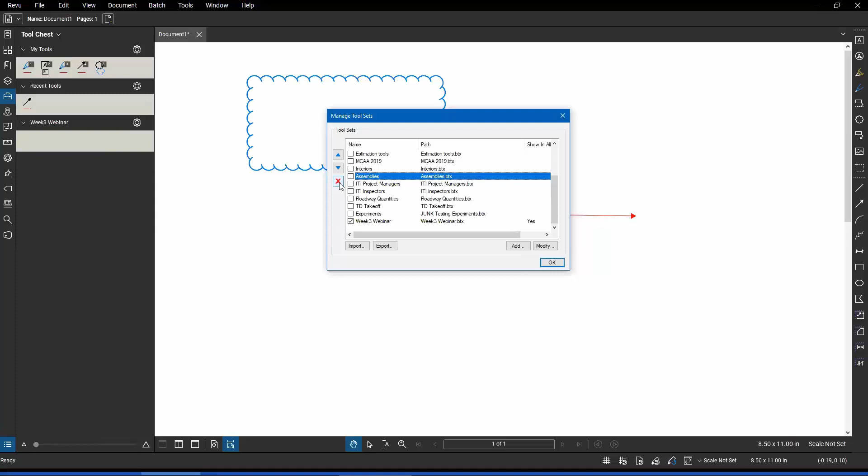The reason it is disabled for delete is not because I've got it active or displayed or not displayed, it's 100% because of my choice to make it show in all profiles. When a tool set is displayed in all profiles, you cannot delete it.

So what you would have to do is modify it and undo that choice. That will now make it only available in the current profile, and then you'd be able to select it and delete it if indeed you chose to do that for some reason.

So I'm going to make it visible, hit OK, and open it up right here. Now I've got two markups in my document. I'm going to draw a couple more. I'm going to draw a highlight, and then since my document doesn't have any scale, I'm going to go to the lower right-hand corner and add a scale to it, and I'll say, just for giggles, this is 1/4 of an inch equals a foot.

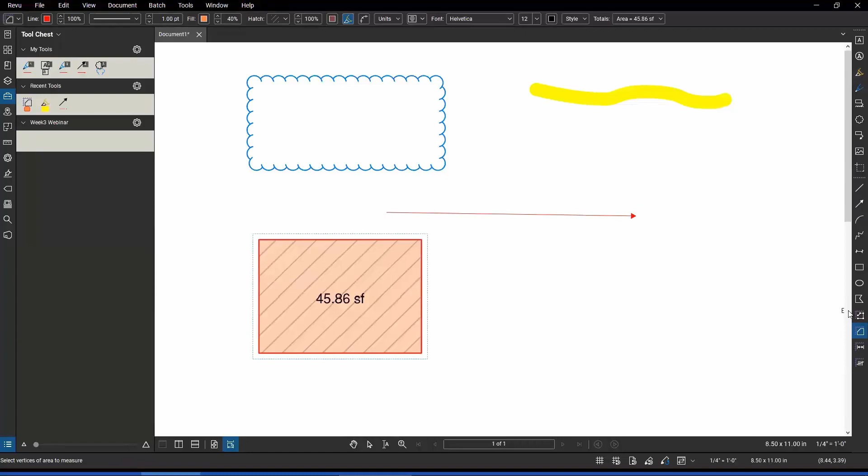And then I'm going to place an area measurement, and then I'm going to go place a poly length, so that I've got some markups in there that have actual measurement values associated with them as well.

Any one of those things I can select, right click, and choose Add to Tool Chest. Now I've only got two that are available to me. You see Recent Tools obviously is not one that's available because that's not how it works. It tracks you, you don't put stuff into it consciously. And if you put something in there, you want to get it out before you shut down Bluebeam.

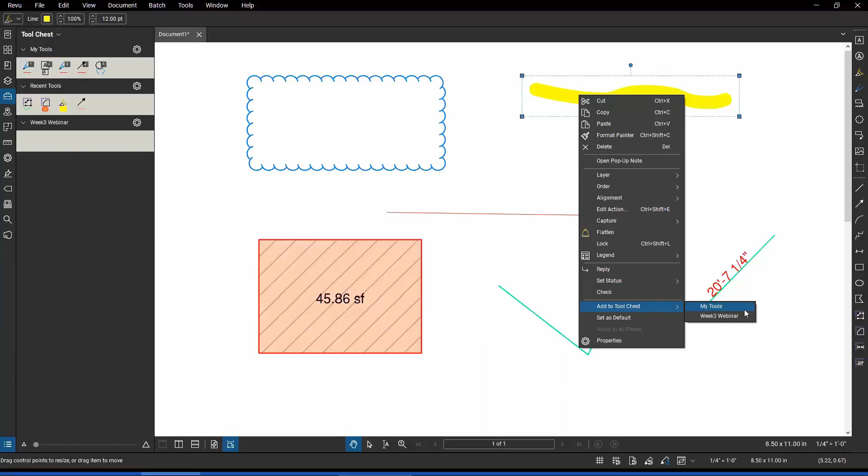So I'm going to choose this new one and put it in there. I'm going to choose this cloud and put that into that same one. Then I'm going to grab the area measurement and put that in there. And then I'm going to grab the poly length and put that in there as well. So I've got a total of 4 markups from my 5 markups that I've now put into a toolset.

For future reuse, I'm going to grab everything in the document and just delete it because it was only there so that I could populate my toolset.

When you're looking at a toolset that you've created and put markups into, there's 2 different ways of using them and putting them back into documents. One way is to simply click on it, and it will go into your drawing, whichever drawing you currently have active, and you place a data point, and it makes an exact copy of it. Now, as soon as it did it, it stopped and it let go.

That's because in the status bar at the bottom of the page, I currently have my reuse markup tool disabled. I'm going to turn that back on. Now, when I come in and choose that same markup and place it, I can keep placing it and placing it and placing it. So it works the same way. This reuse tool works the same way with toolset markups as it does when you're creating markups from scratch.

It starts a function, and I'm just doing Control Z here to undo the things that I've done. It starts a process, and it keeps repeating that process until you hit the escape key. Now that's one way of placing a markup from a toolset, and it's called drawing mode. What that means is I'm going to choose it and place it, and I want a copy that's exactly like it, exactly like it.

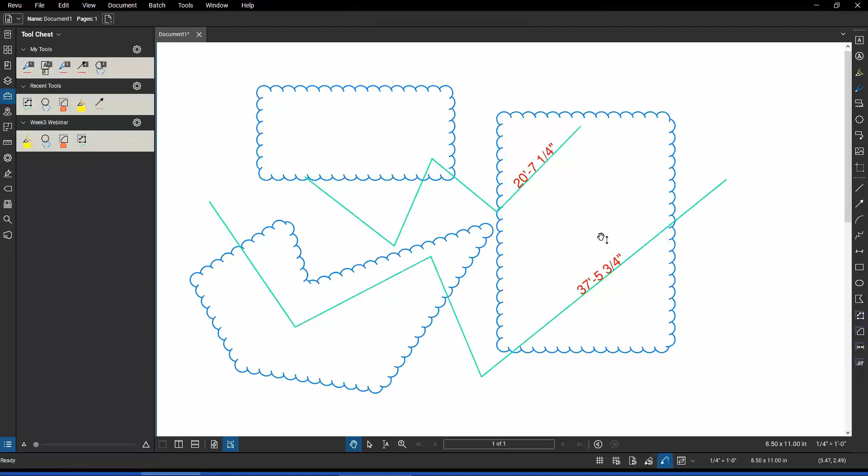I'm going to delete all of that and we're going to talk about standards. When I come in here and draw a cloud from here to here and it's blue and has all that type of stuff in it, unless I go to the trouble of making certain that all of my defaults have been set to exactly the way I want it, it's always going to default back to the delivered standard. Now I'm going to right click on that and look at some of the things that we can do.

Some of the things you really want to think about here is whether or not you want to put this on a particular layer. An example of this is when you're doing design review, you probably don't just want all markups to be blue. You want a standard so that when a group like the architectural design firm comments on our document, especially in a cloud studio session, their markups look like this blue cloud and are placed on a named layer. I'm going to create a layer called Architects Comments.

But I don't want that to be my default because I do a whole bunch of different types. If I go back and hover over that cloud, that copy of the markup was created several minutes ago. It didn't have any layer assigned to it, it didn't have any specifics assigned to it, so I'm just going to grab it and delete it, get it out of my tool set.

Later on, I'm going to grab this one and make sure it's exactly what I want. I'm going to change the fill to also be blue, but with a very light screening associated with it. It's already on the proper layer that I want. Now I'm going to add it to my tool chest, and when I hover over there, you'll see it's got a layer assignment. So every time I place it, it will go to the layer specifically assigned to architectural comments versus engineer comments versus contractor comments versus auditor comments, whatever your particular project participants happen to be.

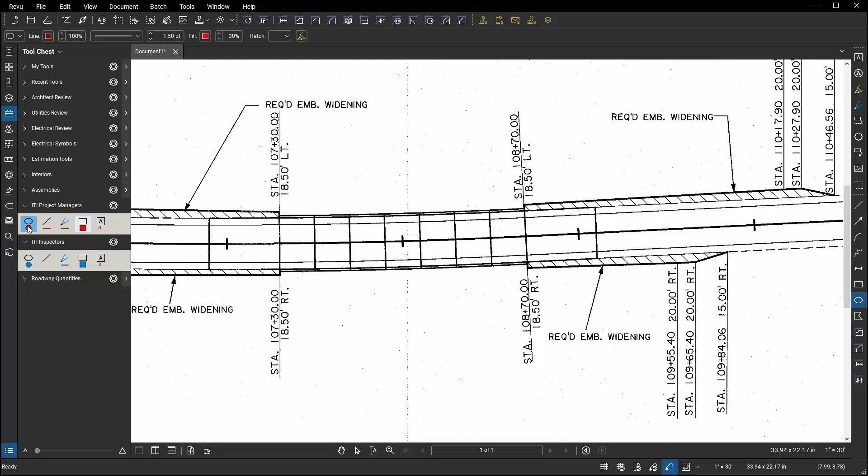So if I choose a Project Manager markup and place it in the document, then go back and check my layers, just by the act of marking up the document, the layers have been generated automatically. If I go back and choose an inspector markup and do something along those lines, then check the layers again, we'll see that one's been generated as well.

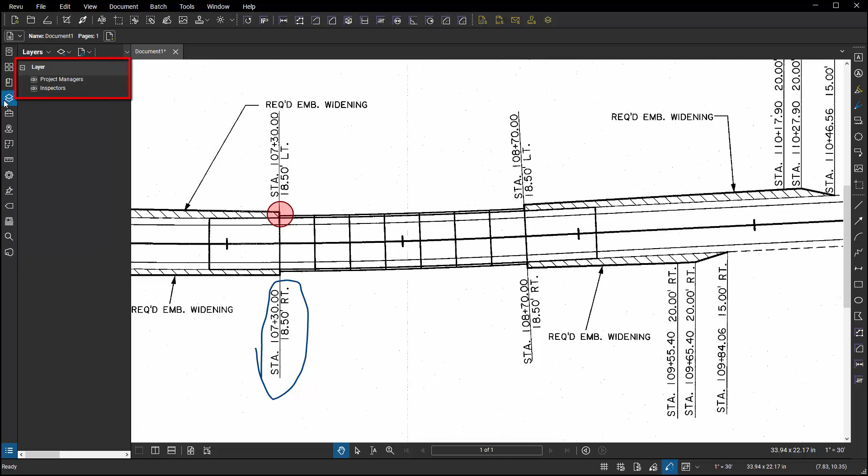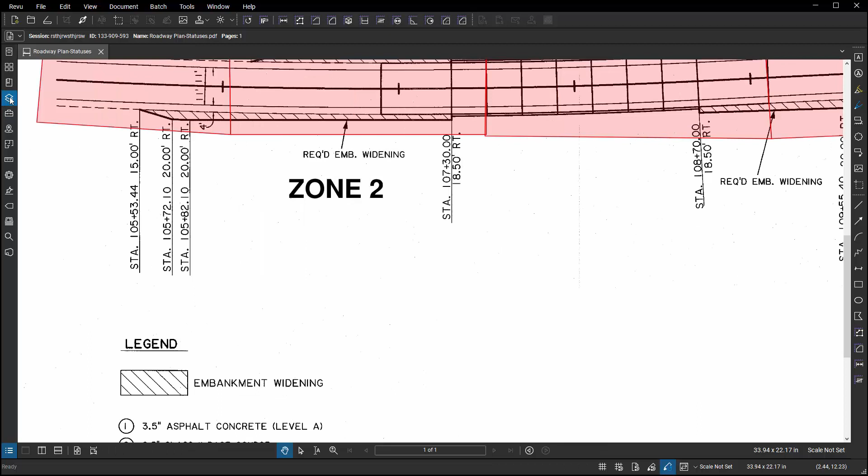Now, one catch to this is that if you're working in a studio session, the layer names have to exist in the file before you start placing markups into the drawing, or they're going to be placed in there without the layer assignments. Here I'm in a studio session and I've uploaded a copy of that exact same file, and if I look at the layers, we can see there are no layer names created here. If I go back to tool sets and use the exact same tool set with the exact same markups, and place a markup into this document, we'll see that the layer name has been prevented from being created. And if I select that markup and right click, we can see it also has not been assigned to a layer.

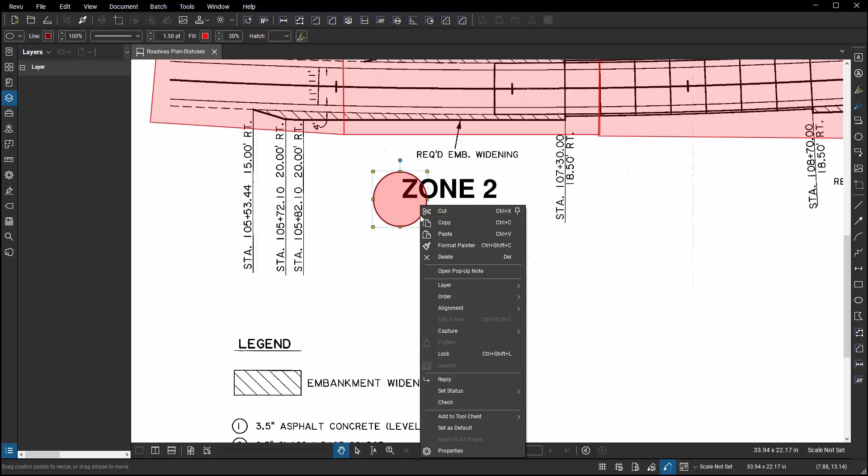Now that will work properly provided the PDF file has the layer names before it's uploaded to the studio session. But it still calls it a cloud. And what I really should do is, before I put anything into a tool set, put some real good thought into what I'm naming it, so that when I look at the markup list down here, instead of it just saying cloud, it has information that helps me understand what that thing is. So you really want to change that to say these are, I'll just call it architectural. It's already in there, that's fine. Now, I don't want to keep doing that over and over again.

So instead, what I should have done, the better methodology for you guys to follow, is when you have your graphic created that you're going to put into a tool set, in addition to doing any kind of layer manipulation that you're going to do, also while it's highlighted, go look at the properties panel.

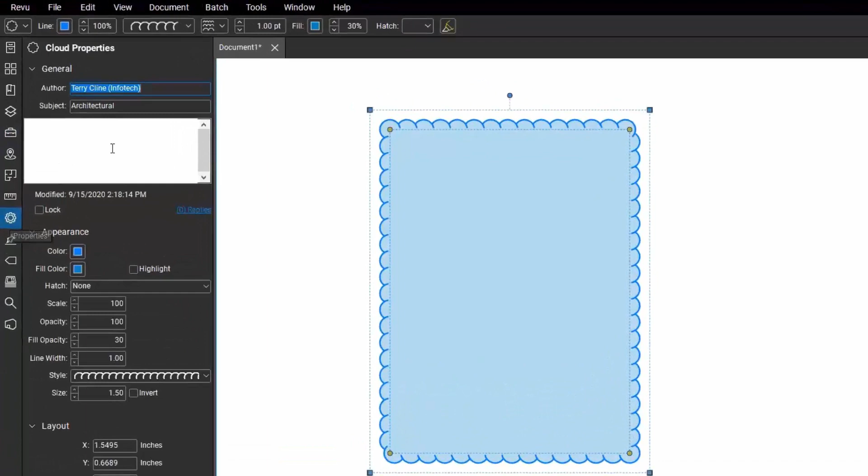Inside there, specifically, you want to look at the top of the panel, and look at the value that's in the subject field, right in here. I'm going to put architectural, so it's got the proper label that I want, and all the values that I want.

Now I can either come back and right click and add it to the tool set, or directly from the properties panel, I can go to the bottom of the panel where there's another link that lets me automatically pop it in there. Now it has both a good subject, a good layer, and all the properties and characteristics the way I want them.

I've already shown you by double clicking or choosing drawing mode, you can change the behavior of a markup as you put it back into your file. You can also change the behavior of the tool set itself, not just the markups inside of it. I'm going to minimize these.

Currently, this displaying of the content of a tool set is called symbol mode, because it's showing me an abbreviated icon for each of the markups inside of this tool set. But if you go to that gear, click on settings, and change it from symbol to detail display, it's the same information but displayed in a very different way.

It also gives you access to two other columns of information for all of the markups that you put into your particular tool set.

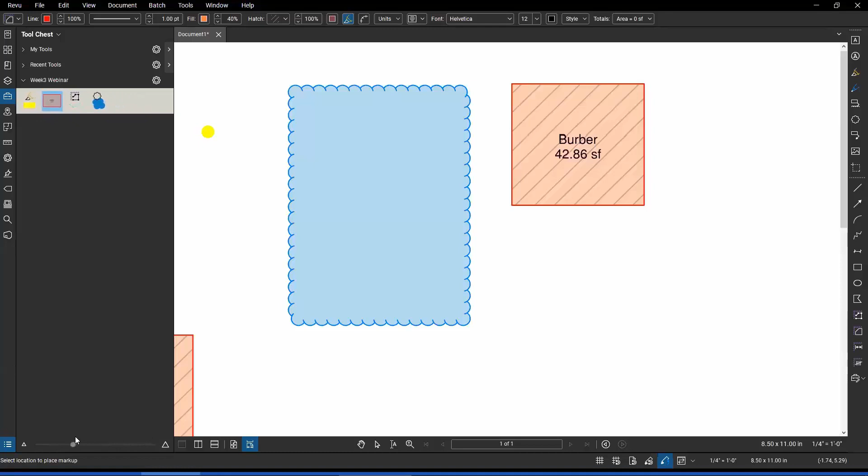Down at the bottom of the interface, there's a sliding magnification button. If you grab that and slide it left and right, it gets bigger or smaller depending on where you put it. I need to be very clear, that has nothing to do with the scaling of the symbol as it goes into your drawing. If I choose drawing mode, click and place that shape, then come back, lower the magnification, and place it again, it's going to be identical. This slider bar is purely a magnification feature so you can see it more clearly, and you've got control over the size of those icons as they're popping up.

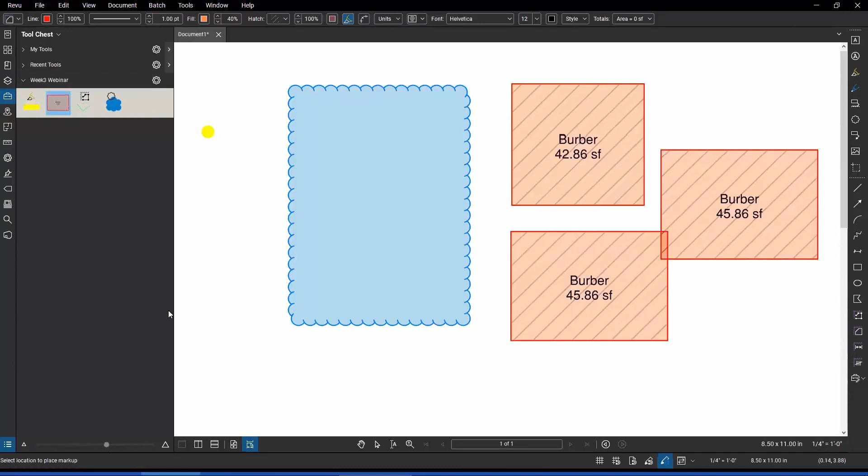And if you do magnify it along those lines, and go back to that toolbar over there, it still supports that, because whether you docked it into a toolbar or not, it's still using the same core part of Bluebeam to look at these parameters, these behavioral choices you've made, and then enforcing those as it does its work.

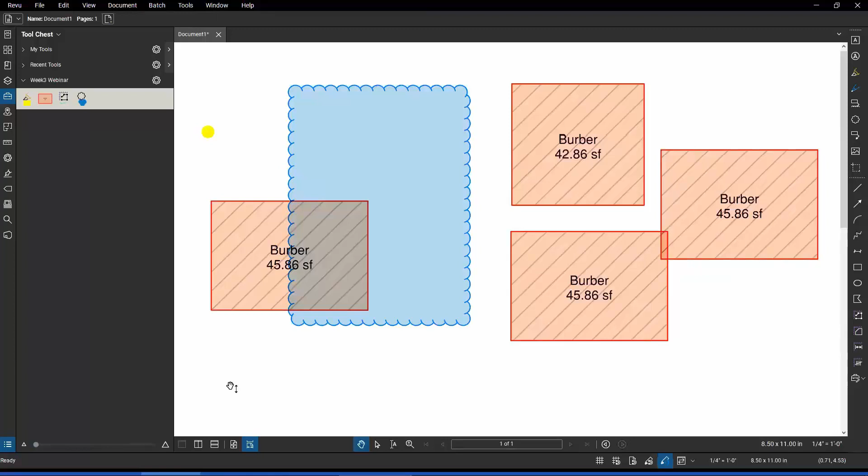Now I'm going to grab all of this stuff and delete it. Now I want to talk about the subject and label combination I've put inside here for one of these things, like this one that says—if I hover over it, it'll tell me that's chilled water line. If I hover over this one, it tells me it's carpet with Berber, and so on.

I've already covered in past week information on custom columns. So down at the bottom here, in addition to these delivered columns, we can go into the markups list, columns, and at the very bottom of that interface is the Manage Columns button, where we can create columns of information unique and specific to us. Maybe a common column people create called responsibility, where there's a pick list that says, okay, I drew this markup, now I'm assigning it to a human being or a subcontractor or whoever it may be—responsibility is a common one.

Now I could sit here and create them from scratch, but there's an option called import, and I've already created some custom columns and saved them. So I'm going to import one of my custom columns by going to where I put them, which is my Revu files, custom columns. Let's go look at flooring types. So I import that, and it says, alright, I'm going to put this into your file.

So here's what I have. I have a column for tracking flooring type that has a list of types: shag carpet, Berber carpet, tile, 9x9 tile, concrete, and each of those is assigned a dollar value for their square footage cost. This is just a pick list of items. But what's important is it's got a subject and it's got something called an item. When you take a markup in a tool set that has a subject and label combination, and it matches a subject and item combination in a custom column, it can automatically detect that relationship and automatically figure out what the cost value or assigned values are.

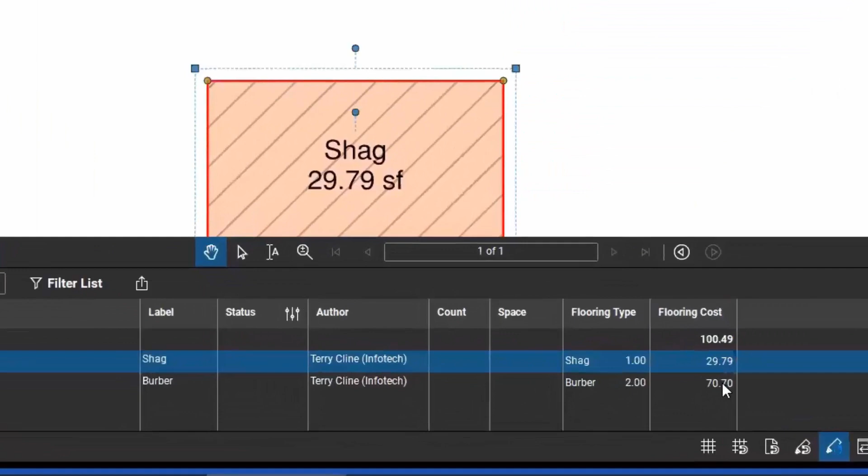Based on what I did, I should be able to choose to place an area measurement specifically identified as carpet with the item or label as Berber. When I choose a standardized markup from a tool set that's been set up properly with the right subject and label combination matching the right subject and item combination in the custom column, I'm not telling it this is shag carpet or Berber. I'm just drawing the object. It's detecting that, figuring out the dollar value, and then running the formula that says take the area, multiply it by the dollar value assigned, and give me a total.

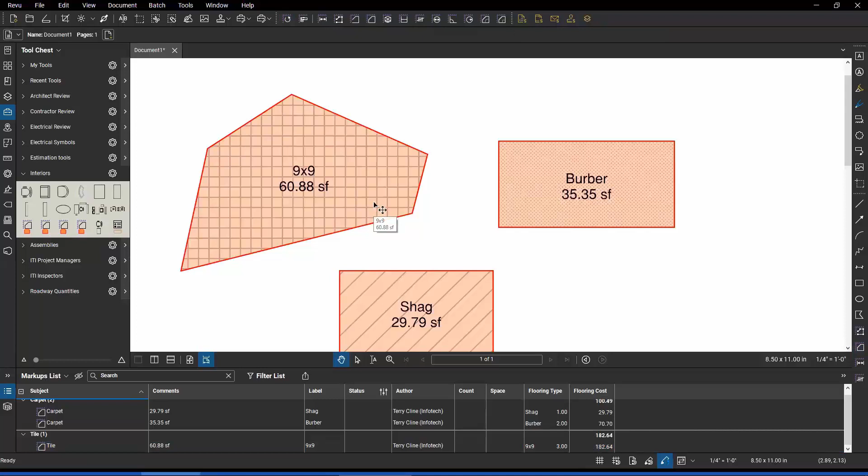So if I came back and said this is a 9x9 tile, now we've got a completely separate one down there. That's another way of gathering up markups. I'm going to grab all of these things and delete them, going back to that other profile called empty, so we can continue pushing stuff into here.

I'm going to open a brand new document from a template, and I have a template here for architectural sections. I think there's some stuff in there I could grab—yeah, we'll grab that symbol for grade right around in here.

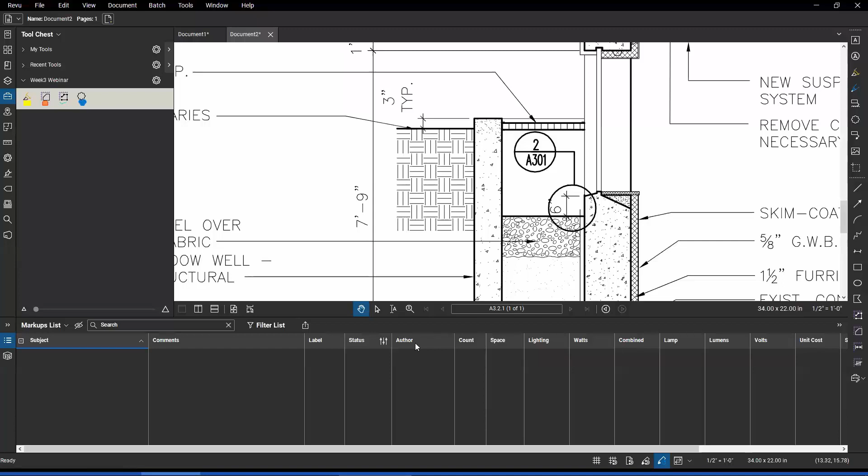Let's say I wanted to capture that and make it a reusable markup I can use in other drawings. That currently is not a markup—it's part of the actual PDF file, it's PDF content. But there's a feature in Bluebeam to capture PDF content and make a markup out of it.

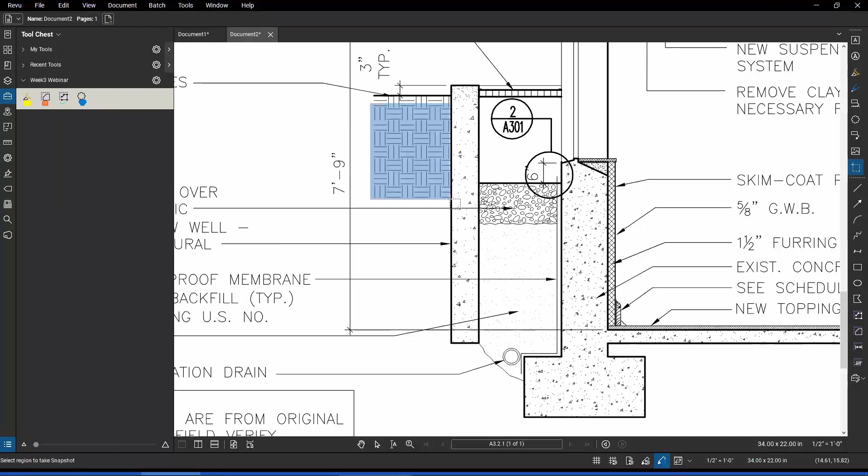That feature is called snapshot. If I go to edit and scroll down, there's one called snapshot, and also snapshot content—they're slightly different, but this one will work fine. You do snapshot and simply click and drag a rectangle around the object you're trying to capture. It puts it into a clipboard, and then you can right click and paste that into your drawing.

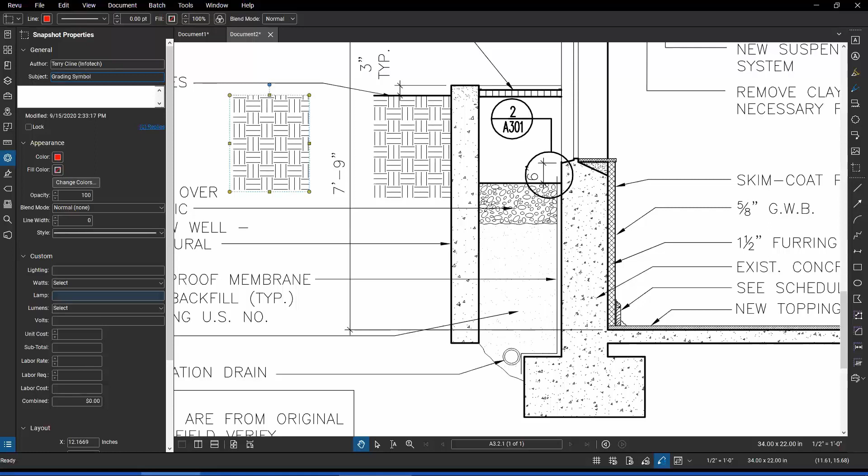If that's exactly what you want, you can right click on it and add it to a tool chest. But before you do, I'd suggest you go to properties and give it a decent name—so it's not just a snapshot, it's grading symbol. Then I'll go down and add it to tool chest, putting it into that week 3 webinar. That way when I click on it and place it, it's going to say grading symbol instead of just snapshot like it did before.

If I wanted the same thing for concrete, a repeatable copy of this concrete pattern, I would go in and do the same thing: edit, snapshot, grab as much of it as I felt was important, then paste it. Then in properties, scroll up to subject and call it concrete pattern, then scroll down and add it to my tool set.

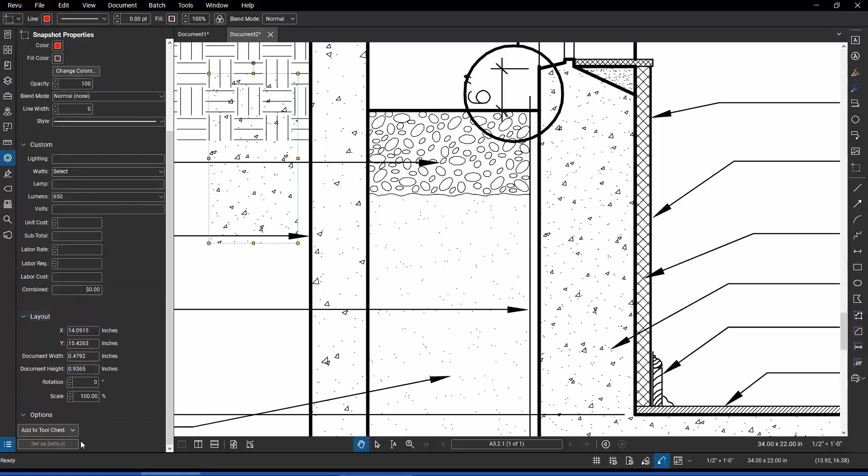Now, here's the thing people do when they first start doing captures with snapshots—they get it in there and forget that they put it into the drawing just so they could grab it. So make sure you don't forget to go back and delete the stuff that's already there.

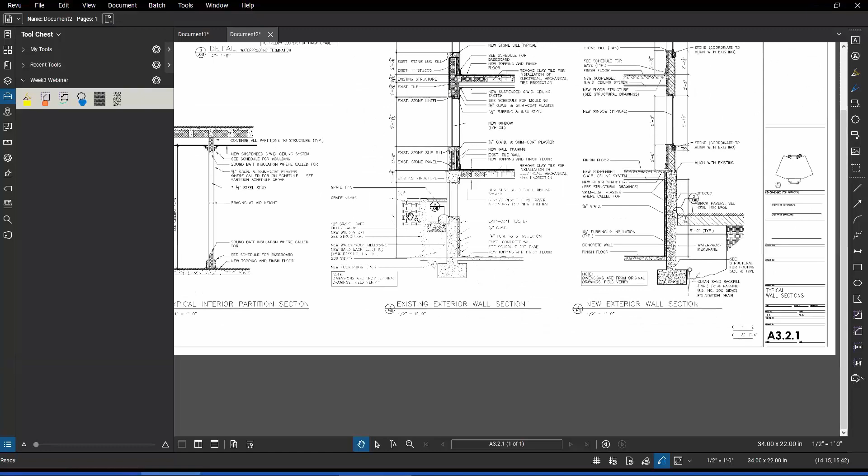Okay, next, creating counts. Now I'm going to open up a different drawing here. In fact, I'm going to close down all of this stuff, and we're going to talk about count markups and how that's relevant to your tool sets.

If I go and open a new file, I'm going to say File, New Electrical File right here. So what I want to do is I want to count these symbols.

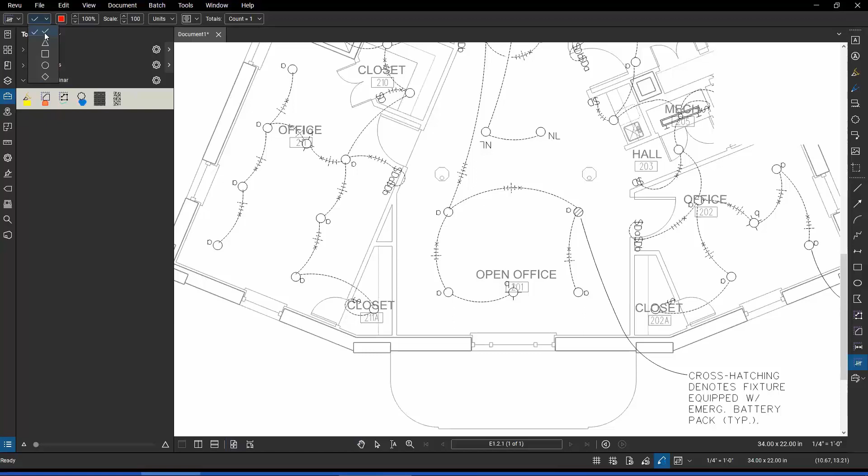Now I know I can come into the standard delivered markup toolbar, and there's a count button there, and I can choose that. I can go into the Properties toolbar and change it from a checkbox to some other shape. But I'm just going to leave it as a checkbox right now, and I can just start counting.

All right, there's one of those. Oh, that's different, that one's different. Here's one of these, one of these, one of these, one of these. We talked about that last week or the week before when we were doing count searches and so on.

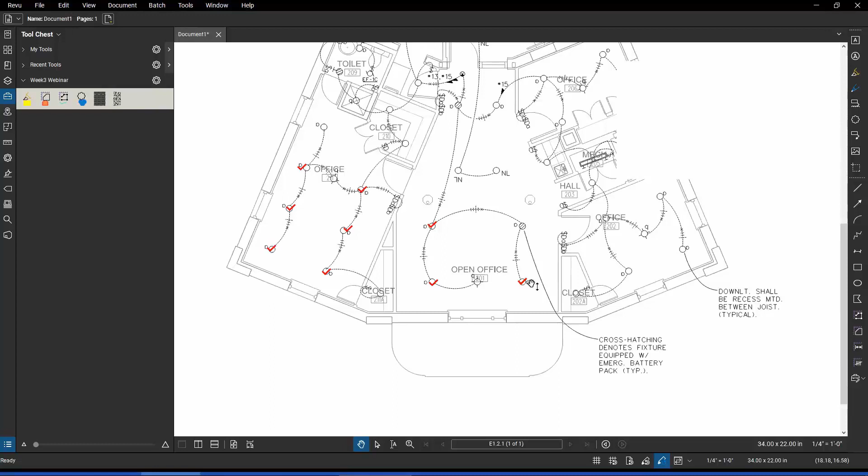But that's a way of counting items on your drawing. Now, if indeed you wanted that to look very different, I'm going to grab all of that and delete it. You can create your own markup and use it in order to count things.

Now I'm going to put a little cloud here, and I'm going to grab that cloud, right click on it, and go to Properties, and change a few things about it. First, I'm going to change the layer, and create a brand new layer called Spotlights. It doesn't exist until this moment, but now it does.

Now I'm going to click on that thing, and I'll say that this is a spotlight. Now I'm going to add it to our tool set by telling it to add it to our tool set, and it did. Now I'm halfway there.

I've got a symbol that represents spotlights, but if I click on it and start saying, okay, there's one, there's one, there's one, it's not really counting at this point.

What I need to do to have a counting version of that is go into the tool set, click on it, right click, and say I want to create an equivalent copy that has the same parameters, but it will keep track of how many. It's an actual counting markup. You can always tell the difference between one that is and one that isn't, because one that is has this little 4 slashes with a slash through it, a mathematical indicator with the little scale value.

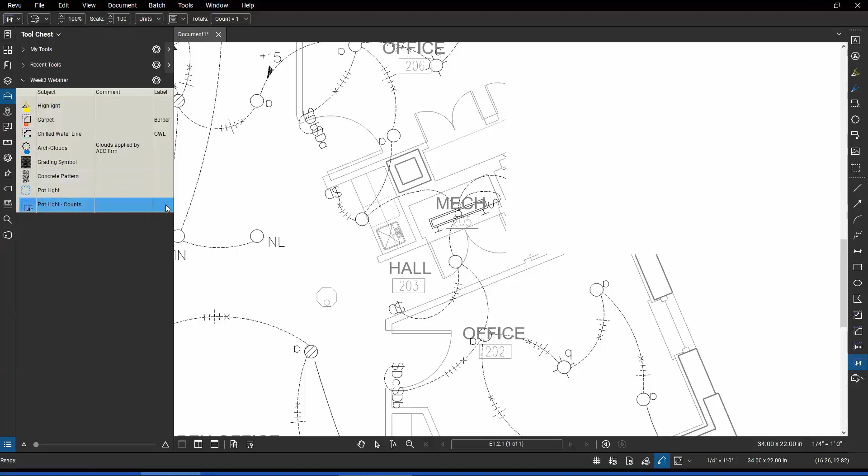That's the count measurement. Now, if I go back into detail mode and change this, I'm going to call this Pot Light, I might even put counts, something along those lines. And maybe under label I put in Pot Light, but you don't really have to. I just wanted you to know that that was there if you choose to use it.

But now I can choose Pot Light, and I can come over here from my tool set and say, all right, there's one, there's one, there's one, there's one, there's one, there's one. I hit escape, I go down and look at my markup list. It says, hey, for pot lights there's 6 of those, and they all happen to be on a particular layer.

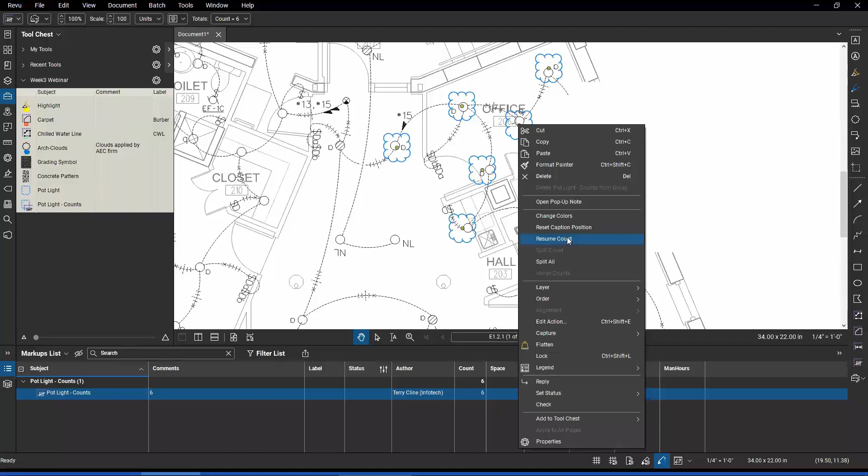And then I realize, oh yeah, I need to keep going with that. There's one here. So I go and right click on the existing count. Now I can take advantage of the same count markup features I get when I do it from scratch. I can resume counting if I choose to do that. So, oh yeah, there's one over here, there's one over here. Do that, hit escape. Now it knows that there's 12 of those instead of 6.

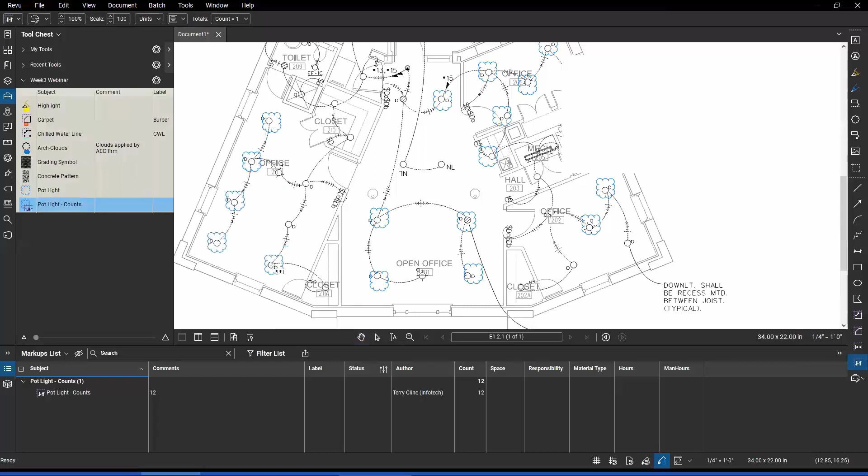Or maybe I don't resume count, I do different counts where I come back and say I want to do a count, boom, boom, boom, boom. Hit escape to get out of that. Now it knows that there's a total of 19, 12 of which are grouped together, and 7 of which for some reason are in a separate grouping.

Right now you can always merge those together or split the counts. There's lots of things that you can do with that.

But the other thing you can do, now that you have a tool set, and in that tool set you have a count item, when you come into the standard markup tool for shapes that's delivered from Bluebeam and you start doing manual counts, in addition to these shapes that were there before, if you have a tool set with count markups, you can come in and take advantage of those and say, okay, I want to start counting things, but in particular I'd like to use this markup instead of one of the delivered shapes that comes from the system.

Now here's a more dramatic example of that. I'm going to change my profile back to the one I normally use, and do that same task - say I want to count some stuff. When I go to do that pull down, I've got multiple tool sets, and within each of those tool sets, I've got multiple markups with different subjects and labels and that type of information.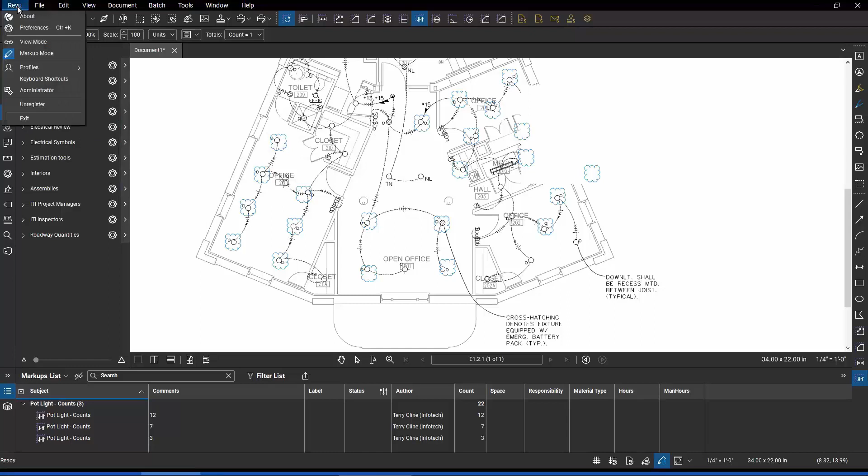It even remembers if that tool set has been set up to display in symbol mode or drawing mode, so all of that information as you're interfacing with the tool sets is still there and available to you. I'm going to jump back to the other profile to get to that tool set we've been creating. So far we've been putting stuff into it, but haven't done anything to the tool set itself, so I'm going to put it back to symbol so it's not so big.

By the way, any one of these, if I double click on it, that's the drawing mode versus property mode. If I click on a count markup, you can't do that - those always go in drawing mode. Same thing with snapshots - if you do snapshots of PDF content and make that a markup in your library, when you double click on it, you don't have the option of going to property mode. That's only for markups created from scratch that aren't count markups, which allow you to toggle it over to either drawing or property mode. So don't be surprised when you're trying to double click on a markup to toggle it to property mode and it doesn't do anything - it's just not set up for that.

Now this tool set has yet to be actually saved, and I've added a bunch of stuff into it. So occasionally, if you're changing the content of your tool set, you're going to want to go and save the changes you've done to it. You can always tell just by clicking on that gear and looking to see if it's been saved or not. Saving it updates the server in essence, or updates your local hidden folder where all your tool sets are stored. It's not the same as making it available for someone else.

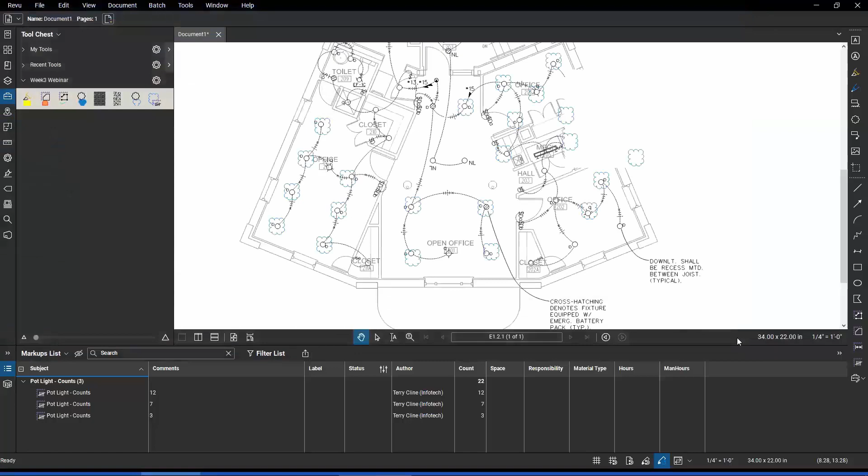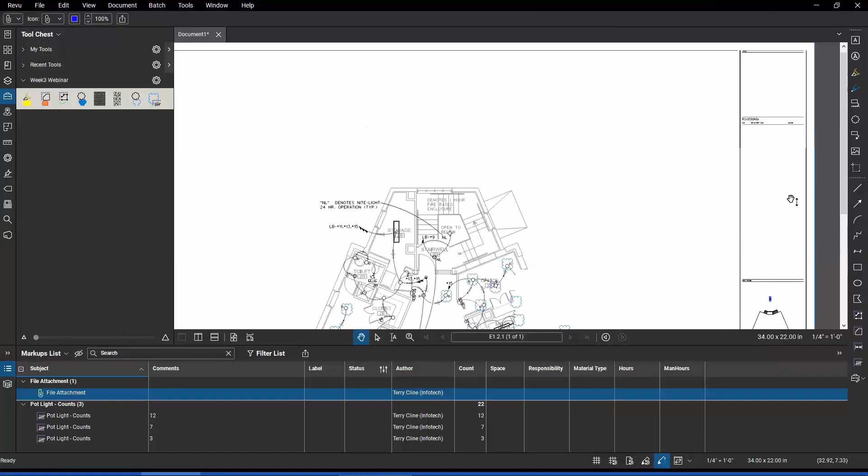I showed recently another way of doing that - go into your document under tools and do a file attachment, taking that same BTX file you created. What I'm showing you, you can do with any file. I'll hit OK, and I'm just going to paste it into my title block. Whomever I share this PDF file with, it's got the BTX file as an attachment embedded into it.

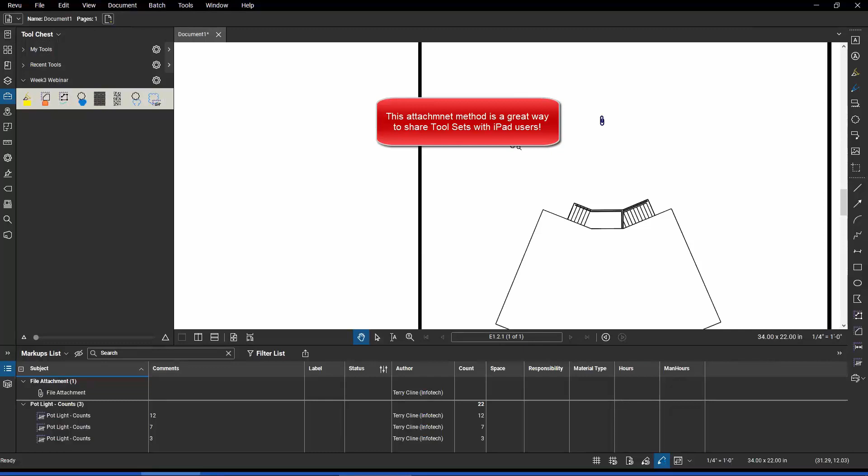All they need is access to this PDF file, and then they can double click right on that paperclip, and it'll take that BTX file and automatically open it up and put it where it's supposed to be, making it one of their accessible toolset files as well. So how you get it to the other project participant doesn't matter as much as the fact that you need to be able to export it and then share that BTX file with them.

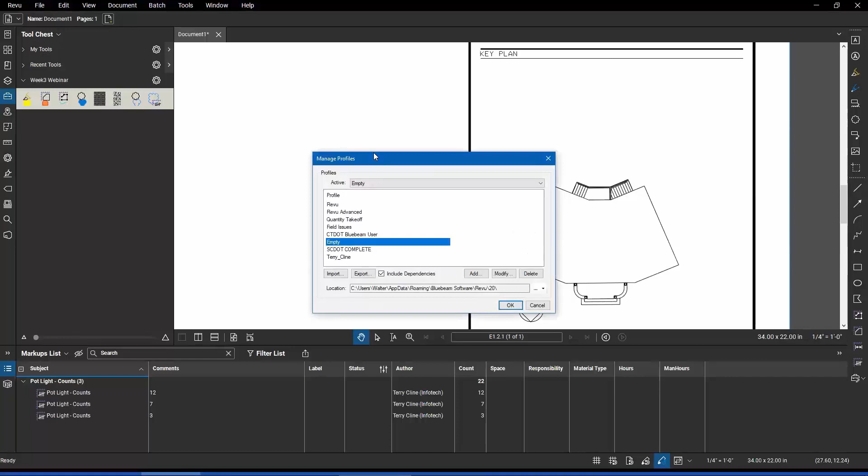Now in the first week, we talked about the interface, and I mentioned that tool sets are part of what makes up a profile. If you were to go to Revu, then Profiles, then Manage Profiles, I can take this entire profile that I chose to call empty - and there's a really bad lightning storm here right now, so hopefully I don't lose you guys - and I could export the profile, and as long as I have this button turned on, the profile will include the dependencies, and one of those dependencies are tool sets that are with that particular profile.

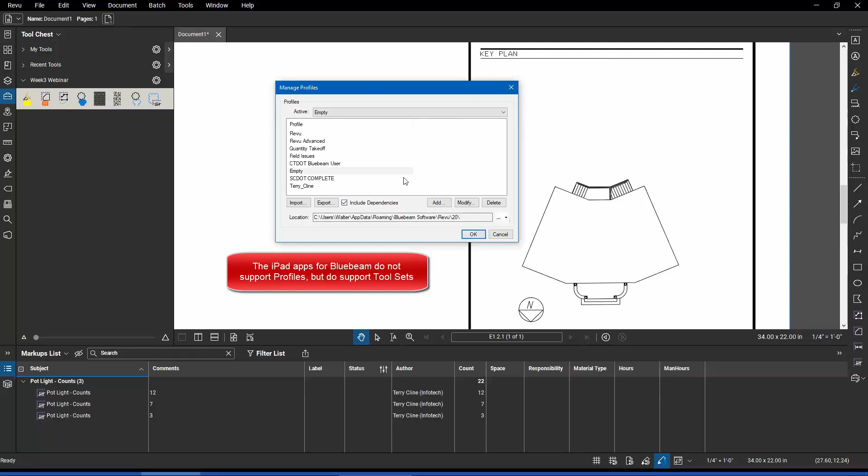If I do that, it's going to create a file called a BPX file, a Bluebeam Profile Exchange file. Then you wouldn't need to send 4 or 5 or 6 separate BTX files. You could send one BPX file and they'd have exactly what they need, more than just the tool set itself. So there are multiple ways of sharing these things.

Now there is a special kind of tool set you can create called a punch list tool set. It's different because you don't build it graphically the way we've been doing with this one. So I'm going to create a brand new tool set. I'll come in here, manage tools, tell it new, and call this Week 3 Punch List. I'll hit OK, and it's going to create an empty tool set.

This is a punch list, and a punch list tool set can be driven by a comma-separated ASCII file. If I double-click on it, or choose it and hit modify, here's an interface asking if I want to import a list of punch key codes and have it build my library from that list. If I choose that and go to the desktop and grab that CSV file called punch list...

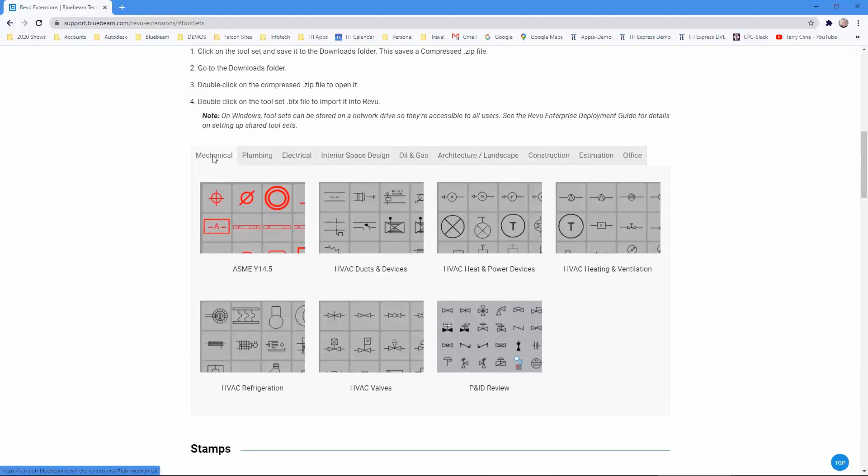If you click on that, it jumps down into the page, and it looks like they gave me 7 tool sets. There are 7 in that category called Mechanical, but there's also Plumbing, Electrical, Interior Space Design, Oil and Gas, Architectural, Construction Estimation, and Office. There's a large number of pre-created tool sets up there that you can choose to grab and download to your local machine. They all come down as zip files.

This is a whatever.zip, but inside that zip file is just a BTX file. You can grab that, double-click on it, and it will make it part of your own Bluebeam profile so you can use it going forward. Again, that web address was support.bluebeam.com/revu-extensions.

Okay, I've got about 4 minutes left. I want to take a few minutes and look at the questions that are coming in.

Somebody's asking specifically to show a formula. I can do that real quick. It doesn't have anything to do with a tool set in particular, unless you're using subject and label to synchronize with subject and item. Custom columns are their own separate entity, but I'll go ahead and show those.

If I open up my markup list at the bottom of the screen and go into custom columns, right there, and I create a new column, I'm going to come in here and say unit cost.

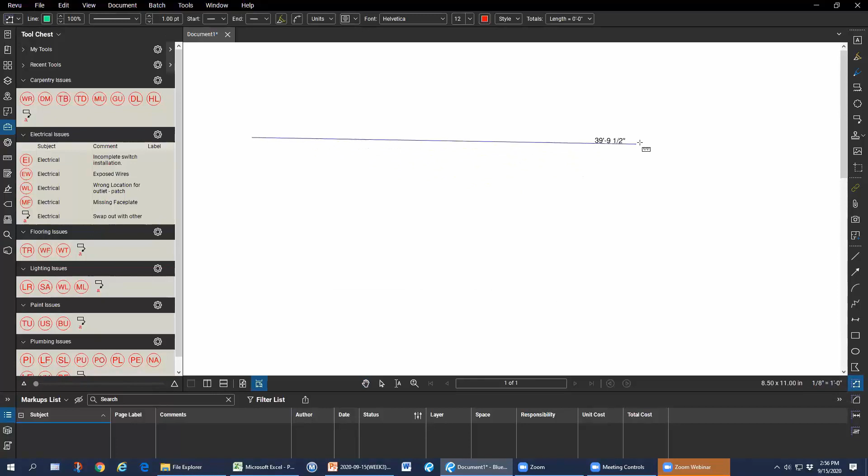Now they're showing up down here. Well, I need a scale because this new file doesn't have a scale, so I'll put a scale into it. And now I'll do a linear polylength, a click and a double click, representing what that thing is, but I haven't put any measurement values in there yet.

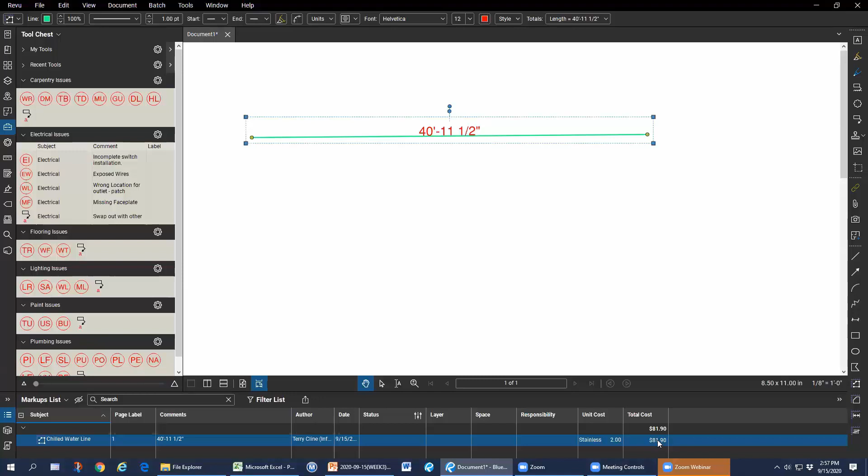So if I choose it and double click, and assign it a value that's stainless, it's going to automatically figure out that, based on your choices and your scaled measurement, it's 40 feet long at $2 a foot, slightly over, so that's what the total cost is going to be. Your formulas can be much more sophisticated and complex than that, but that's a common use of a formula: being able to take an existing custom column and some form of measurement—counting, area, volumes, linear measurements—and combine it with a custom column that has a unit of measure, then calculate those values and display them in the resulting column.

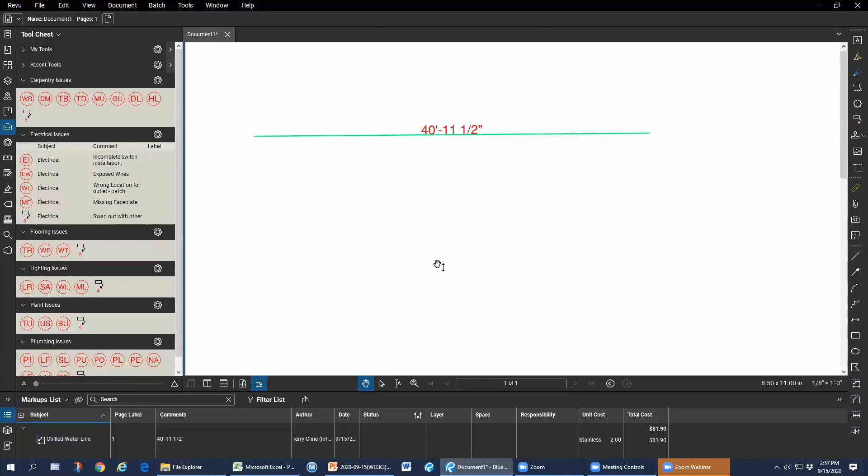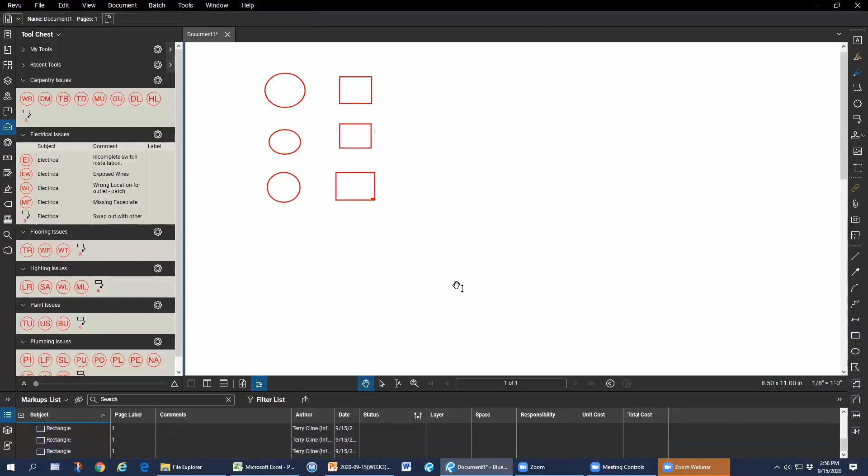The last thing I'll show as we're wrapping up, I think I've got about 2 minutes left, is working with dynamic legends. I'm going to delete all of this, and I'm going to come in here and draw a markup. I'll draw a circle, and another circle, and another circle. Then I'm going to draw a rectangle, from here to here, from here to here, from here to here. Now I can grab any one of those and right click and say I want to create a dynamic legend, and I can start popping my legend in over here.

Based on my own standards, it's coming in here and telling me that this is all handled through properties. I've got my default set to roadway quantities. I would call it shape counts, and I would change that obviously to something different, and put it back on as the shape counts.

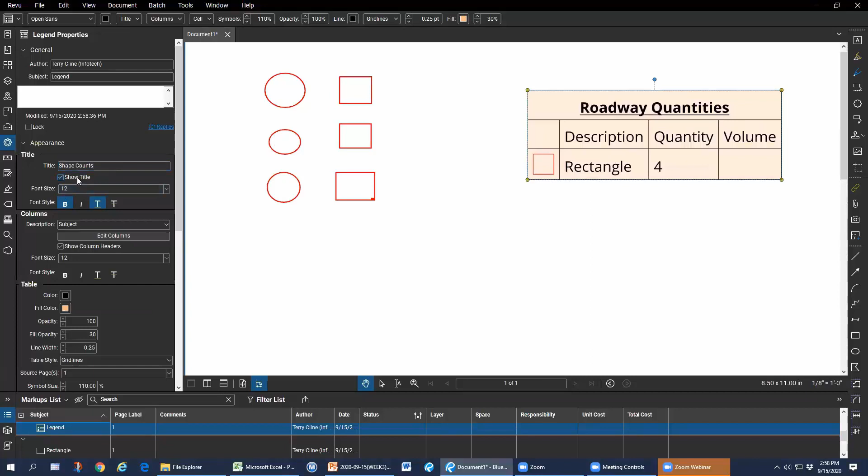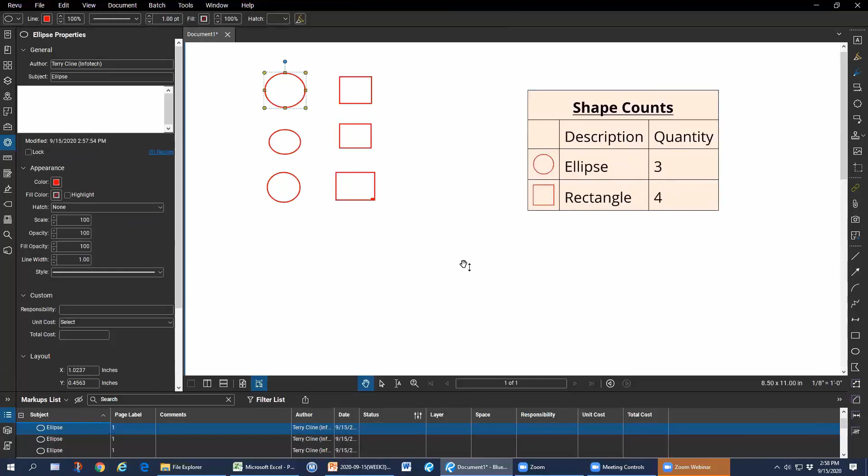I could change—I don't care about volume, so I would go in and edit the columns there and get rid of volume, but I do care about quantity. But see, it only tracked the one item that I picked. Now if I continue to draw those, it'll count those. If I come and grab these, I can add those to a legend, say add that to that, and it'll go grab it and add that to that. But you can do that same sort of thing where the legend is tied to a tool set, and anything you place from that tool set, it's going to automatically start tracking it.

So I'm going to go to a profile where I have more tool sets to work with. I'm going to choose a tool set here called Electrical Symbols. I'll delete this one I did earlier, and from the tool set I'll tell it to create a legend, and place my legend in there.

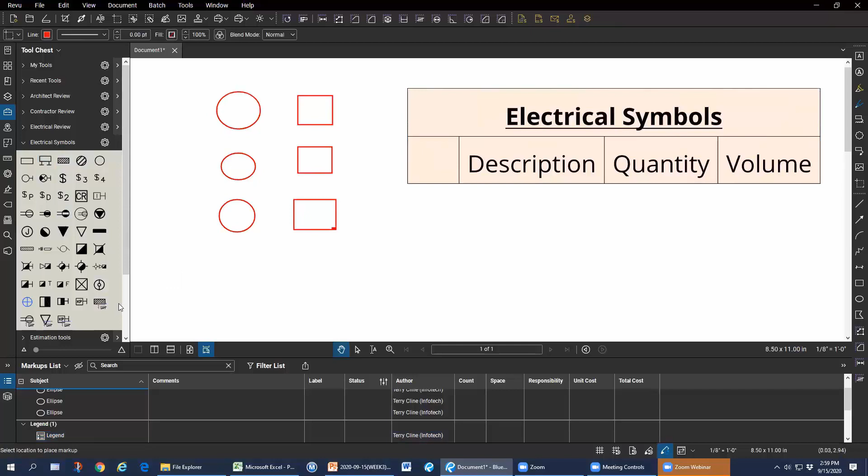Now as I start placing items in here, here's some sort of exit sign. I start hitting data points in the file, and it's automatically tracking how many of those there are. I don't have to constantly come back and tell it to also track this thing or that thing. As soon as I continue placing other symbols from that same tool set, it already knows this legend is interested in quantities from this library, and that relationship is automatically built in.

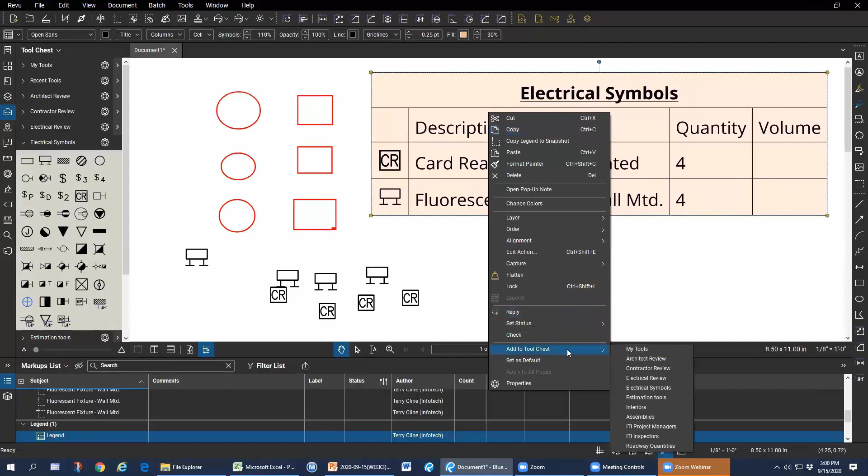You can even grab a legend you've created for a particular library and right-click on it, because it's nothing but a markup, and add it to the library you're pulling from. So in the future, when you're ready to place one of these legends in another drawing, you don't have to start from scratch and edit it every time. You can just grab the symbol, place it, and tie that legend to that tool set. It's a great feature if you've never experimented with legends as they relate to tool sets—take the time to run through it and practice, and I think you'll like it a whole lot.

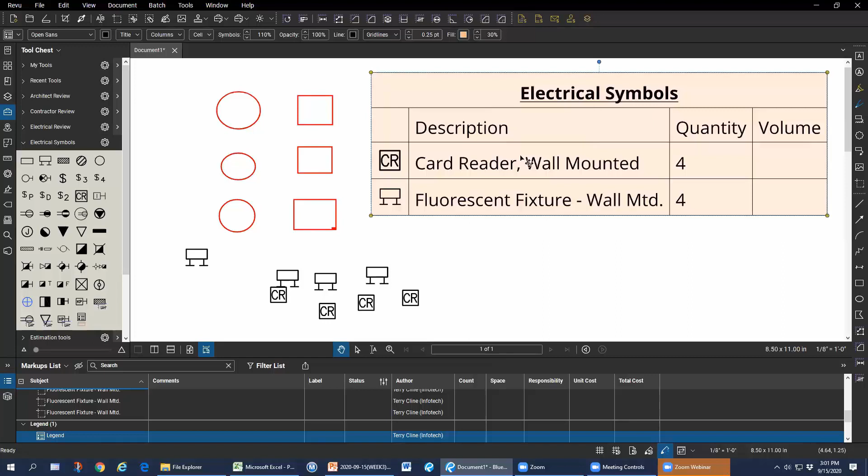Next week, Tuesday at 2 p.m., is going to be all about the cloud technology available from Bluebeam. We're going to talk about not only Studio, but Bluebeam Drawings as well, which was just released a year ago. It's a new free cloud-based server viewing application. If you've never seen that, I'll be covering it next week.